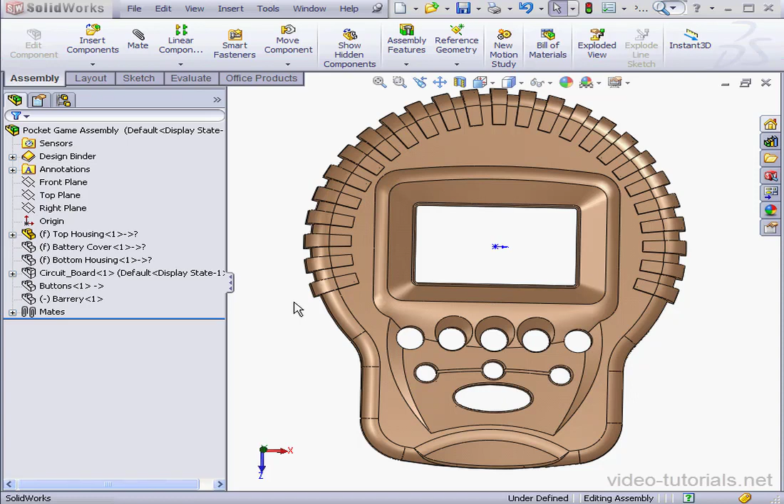Let's begin by showing the bottom housing. Right-click, Show Components. Now let's edit the bottom housing. Right-click, Edit Parts. Let's expand the top housing. Under Extrude 1, we're going to make Sketch 9 visible. That's the sketch we based our ribs on.

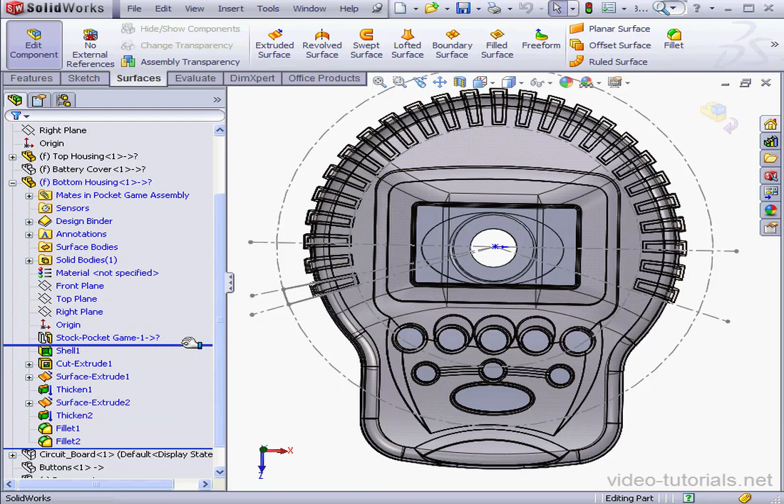Let's collapse the top housing. We'll expand the bottom housing now. And let's roll back above the shell. Now we're ready to design our ribs. Let's right-click and insert a sketch on the top plane.

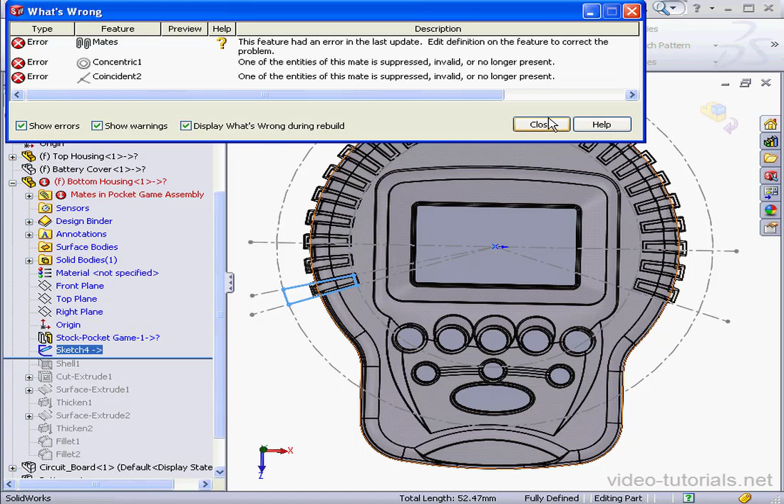We'll select all 4 of these lines with a Shift Select. And select the Convert Entities tool. And let's exit the sketch. We've got a problem with the mate. It's between the bottom housing and the battery. Let's close this window. We'll insert an axis now.

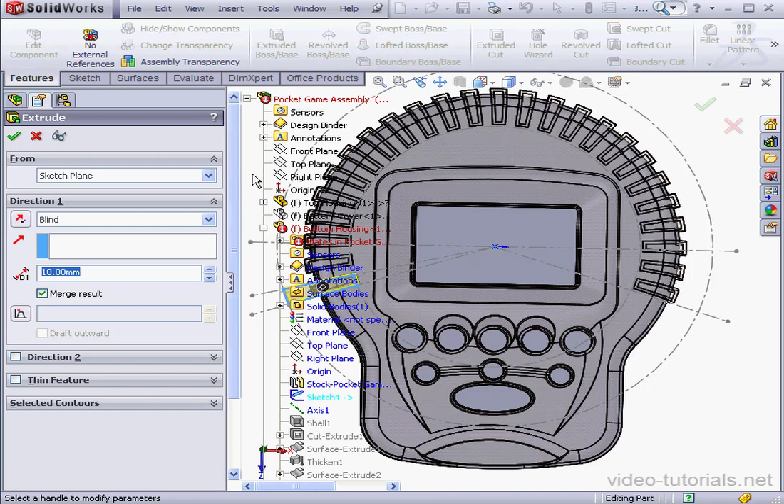We'll use the front and right planes for our axis. Select them from the tree here. And click OK. Now let's select Sketch 4. Go to the Features tab, activate the Extruded Boss tool. And let's collapse the tree so I can see my model a little better. Make sure the extrusion is going in the right direction.

Let's change it to 14 millimeters. And click OK. Now I'm going to select the axis. And then I'll activate the Circular Pattern tool. Bodies to Pattern. Again, I forgot to uncheck Merge Results on the extrude. Let's go and fix that. Click OK. Okay, where were we?

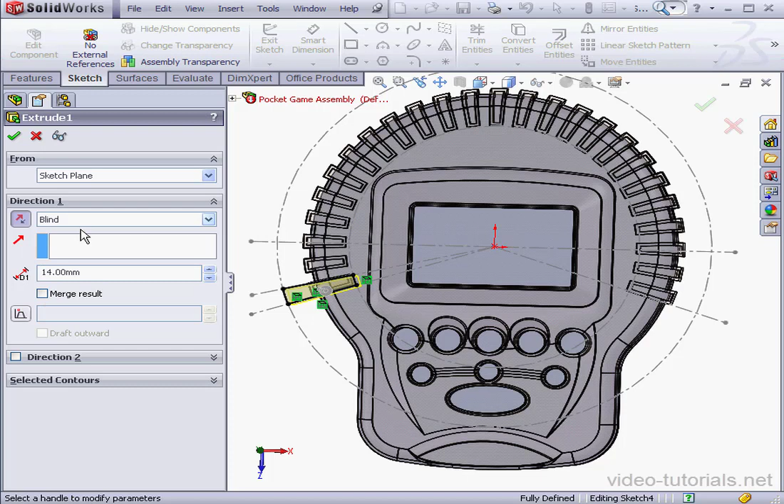Select the axis, back to the Features tab, activate the Circular Pattern tool, and let's select our Bodies to Pattern. This extrude. The number of instances, 25. Here's our preview. Let's click OK.

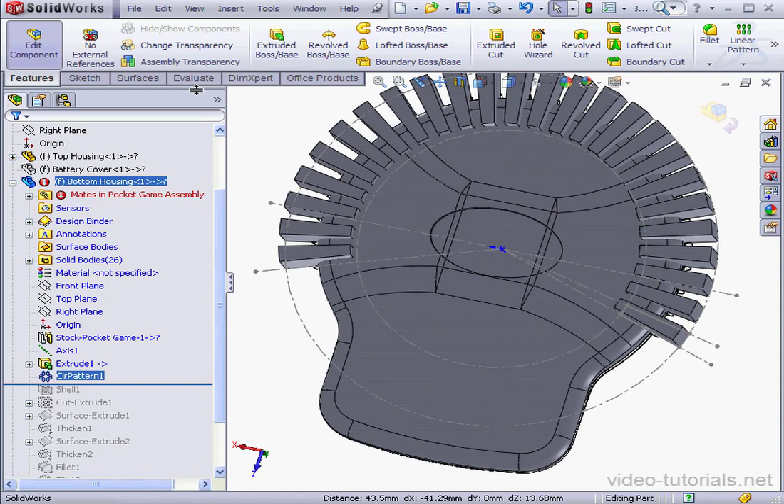Surfaces tab, Offset Surface tool. The distance of our offset will be 2 millimeters. And now let's select the surfaces to offset. There's my 3rd, 4th, 5th. And this one here. This here as well. Just a couple more.

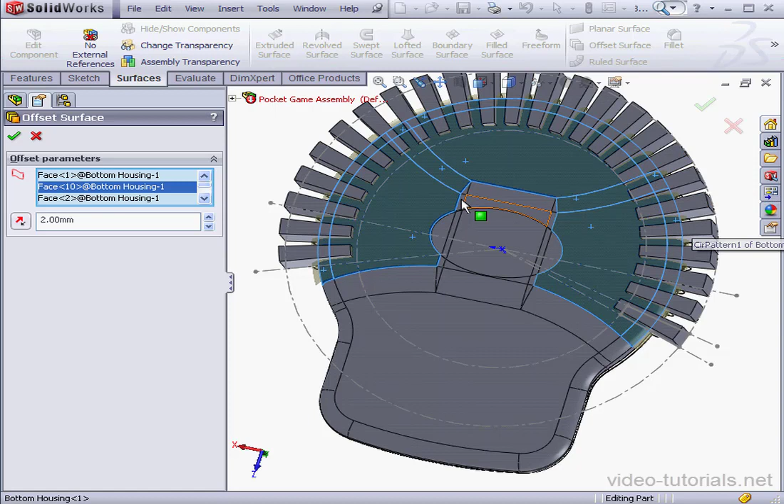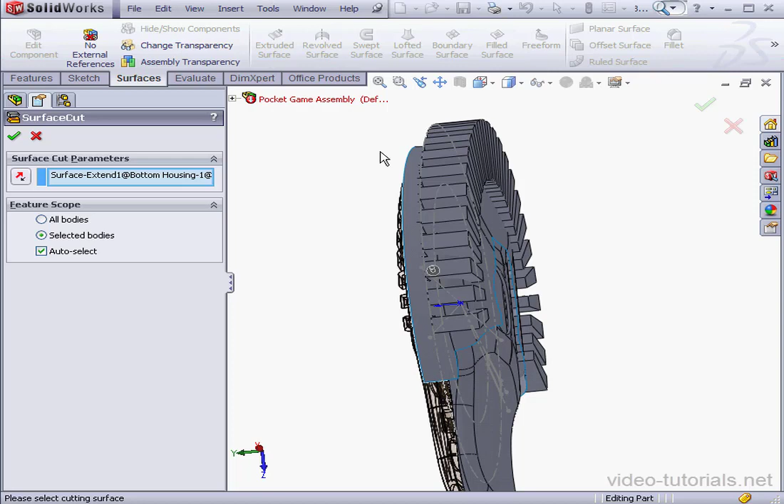And click OK. Now let's activate the Extend Surface tool. 7 millimeters should do it. OK. Let's return to Insert, Cut, with Surface. Our surface is pre-selected. Let's change the direction of the cut. Use all bodies. Click OK.

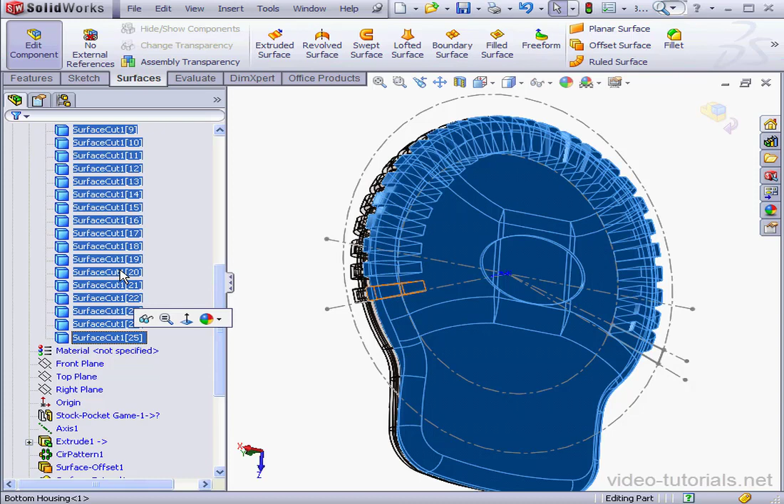Now let's right-click and hide Surface Extend 1. Let's go to our Solid Bodies folder. We've got 26 solid bodies. I want to combine them all together. Shift-select them, right-click, Combine. Operation type, Add, and let's click OK.

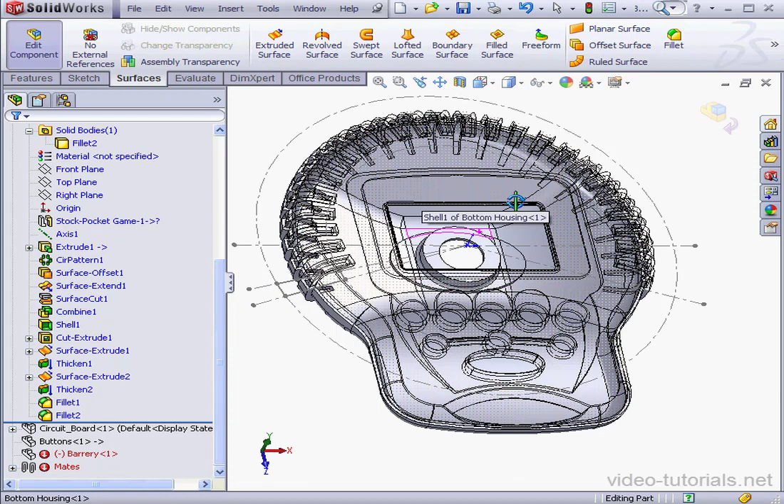And now let's roll our line back down. And we'll have a look. Everything seems fine. Let's exit part editing mode.

Okay, looks good. This concludes our lesson about adding ribs to the bottom housing. Just a few more details to go.